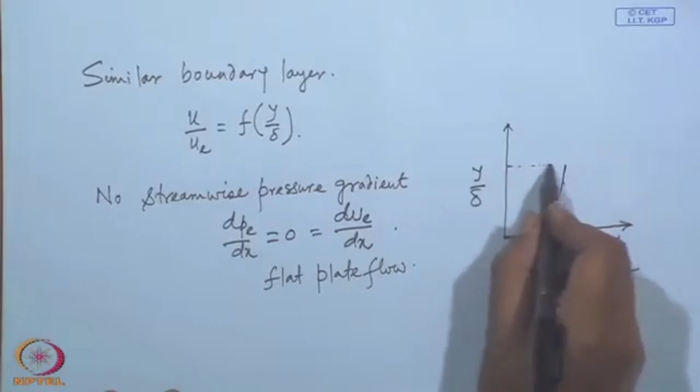Now, before we move forward, a few words about this boundary layer thickness delta. We have earlier also said that this boundary layer thickness delta is a little bit arbitrary. It is not a very suitable parameter to define thickness. There is ambiguity in how to define boundary layer thickness, because in reality there is no well-defined edge where the velocity fully becomes the inviscid flow. So for practical uses, sometimes we take it where the velocity reaches 99.5% of the inviscid flow, sometimes people take it as 99.75% of the inviscid flow, and so on. There is an ambiguity about it. However, it is always used as a parameter and always treated as an unknown. You need to find it.

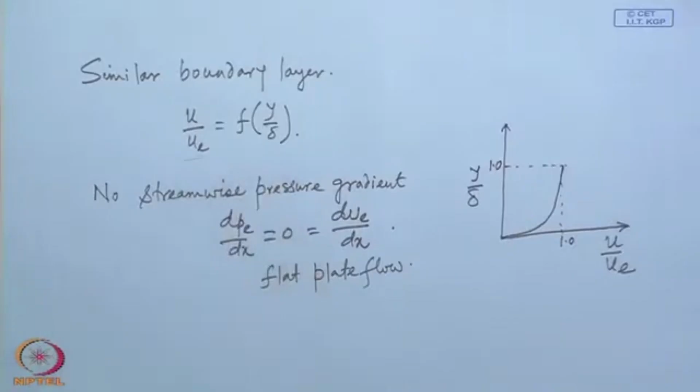A function of y by delta - so that is what we will take, a linear profile. Consider a linear velocity profile.

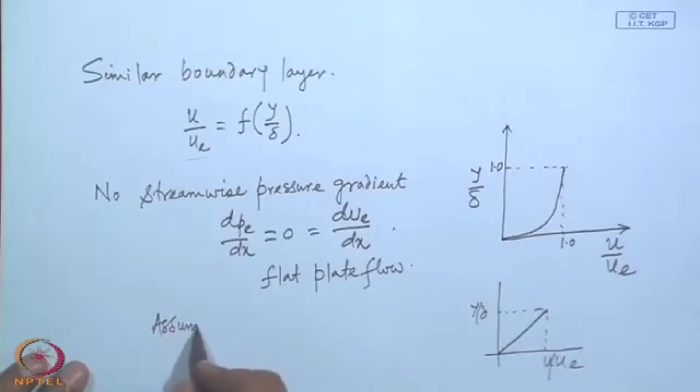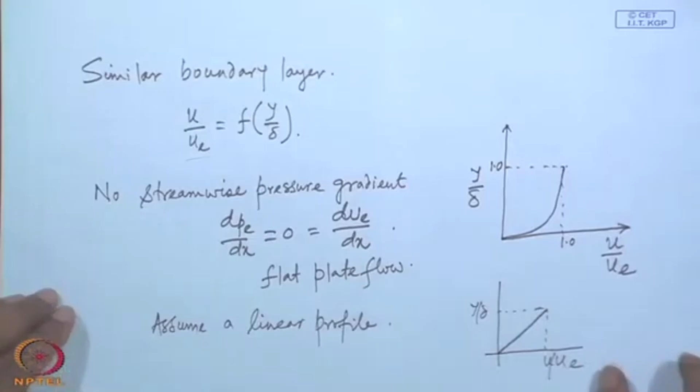The geometry is a flat plate. We would like to see that when the velocity profile is linear, what is the growth of the boundary layer, how the boundary layer grows, what is the skin friction and skin friction drag - that sort of things we would like to find.

Now, if u by u_e equals y by delta, remember delta is unknown, and of course it changes from point to point, that is delta is a function of x, not a constant, and usually delta increases as we move downstream - that is what is boundary layer growth.

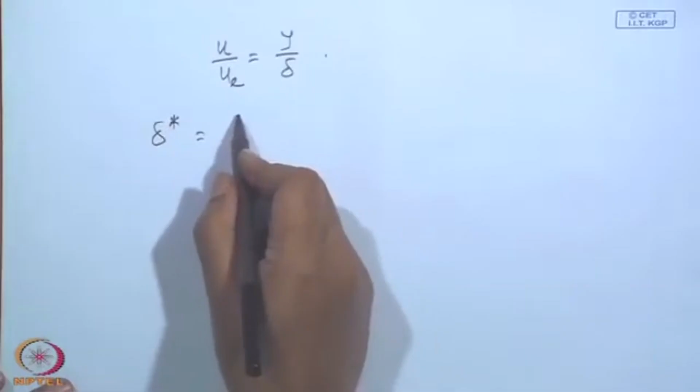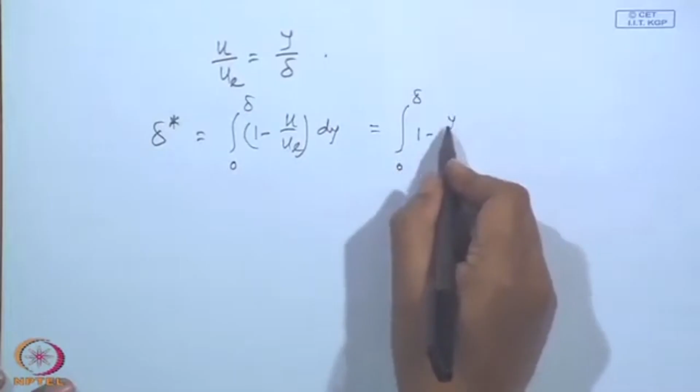So first find out what is delta star. What is delta star? How much is this? This is delta by 2. Okay, so the displacement thickness is delta by 2.

What is the momentum thickness? Theta. Delta by 6. Okay. So what we call the momentum shape parameter, the shape parameter - how much is it? Delta star by theta, that is 3.

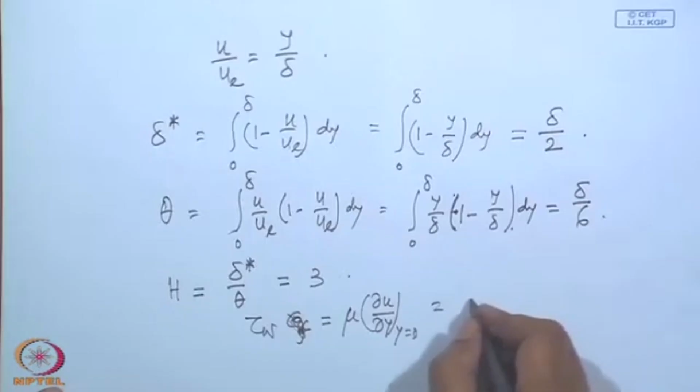And then CF becomes - the skin friction coefficient CF - okay, 2 nu by u square delta. Mu u_e upon delta, yes, that u_e I left, and here there will be no u square, it will simply be u_e. Okay, let us write it.

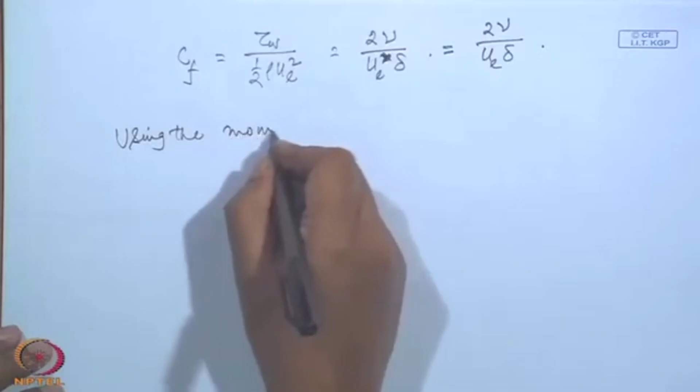So we can now use the momentum integral equation, and let us use the momentum integral equation for zero pressure gradient. The equation is then simply d theta dx equals half CF, that term H plus 2, into theta by u_e into d u_e dx - that is 0, because d u_e dx is 0.

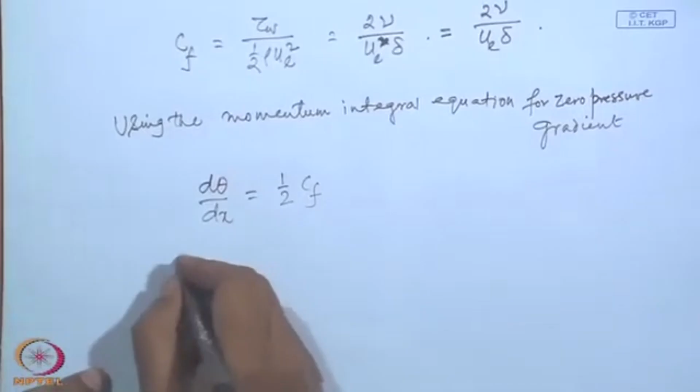So we now have d theta dx equal to - and if we substitute this value, what is d theta dx? One by 6 d delta dx. Half CF is nu by u delta. Okay.

So what is delta now? Under root 12 nu x by u. So, right, delta equals under root 12 - okay, we can write it as 2 root 3, under root nu x by u. The whole expression is under root 2 root 3 mu x, nu x, by u.

Can we express it in terms of local Reynolds number? Local Reynolds number is - Reynolds number, as you know, is u into a length by nu. If we use the local length as x, so u x by nu, that is what is Reynolds number, the local Reynolds number.

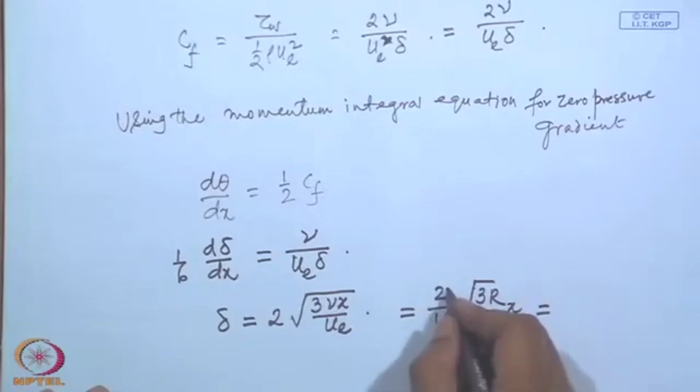Nu by u - that nu by u is still there. Two x into under root 3 by R_x. Otherwise, what it is - 2x, 3 by R_x, or 2 root 3 x - 2x is complete, then under root 3 by R_x. No, we will put it like this: 2 root 3 x, root R_x. R_x - this. Okay, let us see.

Take it for granted. Now, once we have found delta, we can find the other parameters - all of them. Once we have found delta, we can find now what is delta star, what is theta, and what is even CF.

Delta star you can write - delta star is delta by 2. So if we take - yours is correct - then this is... What is CF? What is CF?

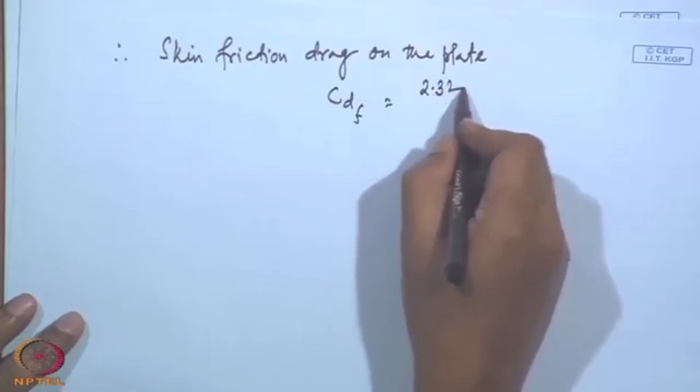So this is the total skin friction for one surface of the plate. So if the plate is immersed in a fluid, then the drag force skin friction drag on the plate is two into that quantity.

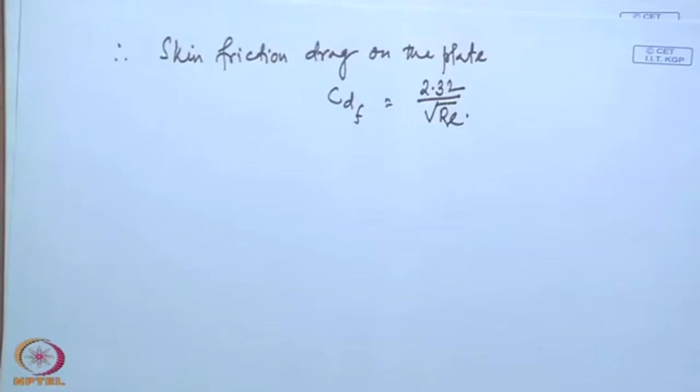So, in case we know the solution or how the velocity profile is, we can get the other answers, particularly the viscous skin friction drag. But as we mentioned earlier, viscous skin friction drag is not the only drag. There are other contributions to drag force also. One is that the boundary layer itself modifies the pressure distribution, and the inviscid pressure distribution does not give any drag force, but when you consider the boundary layer and the modified pressure distribution, that pressure distribution gives some drag force.

In addition, when you consider that the body is finite in the third direction, that finite geometry also produces another drag, known as induced drag. This will also be present, usually proportional to the square of the lift coefficient. And then there will be one more drag which appears only in supersonic flows. Other contributions will be discussed later, not now.

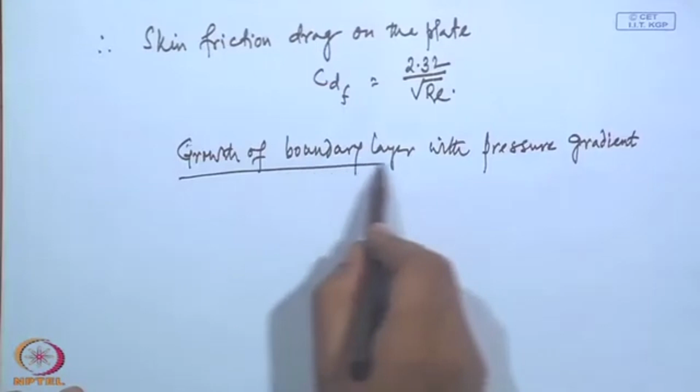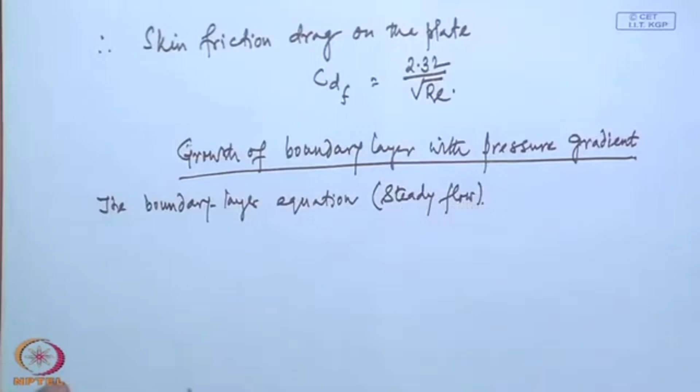To do that, let us once again consider the boundary layer equation. Only the momentum equation we would like to consider, and we will consider steady flow. Which, as you remember, is u du/dx plus v du/dy equal to minus 1 by rho dpe/dx plus nu.

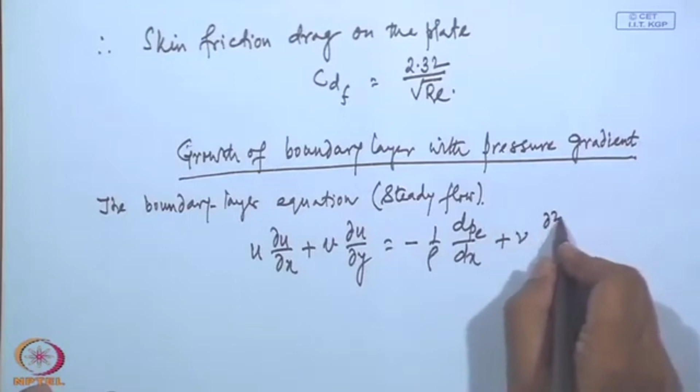This equation is satisfied within the boundary layer, so at y equal to 0 it will also satisfy. Now, satisfy it at y equal to 0. At y equal to 0, we know u is 0, v is 0. So the entire left hand side is 0. So what do we get?

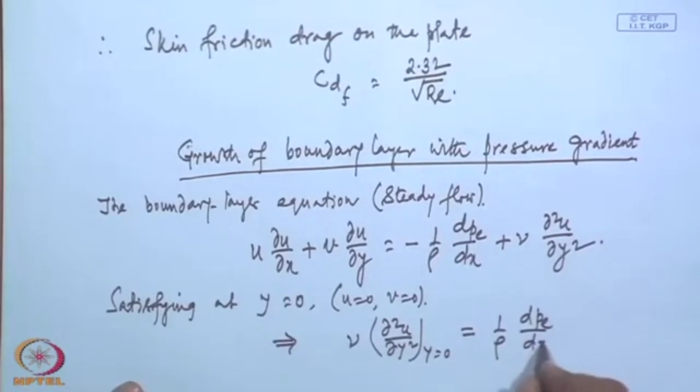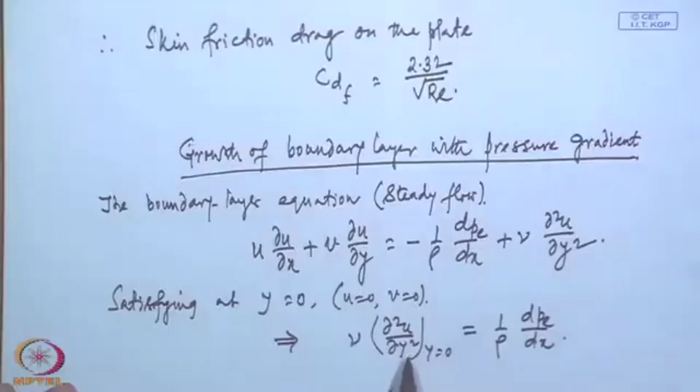Now, first consider the zero pressure gradient case. The zero pressure gradient says that d2u/dy square is 0, or the second derivative of velocity at y equal to 0 is 0. What can we say about the velocity profile then?

What we can say about the velocity gradient, du dy?

Velocity gradient is constant, du dy is constant? No, that is of course not. How much is the velocity gradient at, say, at the edge of the boundary layer? 0, that is known. The du dy at y equal to delta is 0.

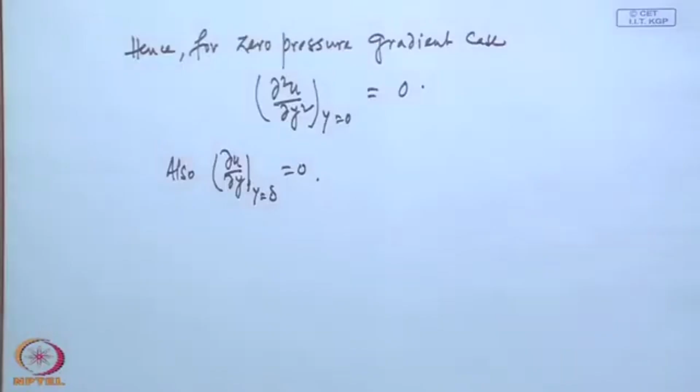At the edge of the boundary layer, the derivative du dy is 0. When does it occur? If the function is not a constant, du dy is not a constant, that we have seen. It might be a function of x. Or we are not considering any y-x variation here, we are just simply differentiating with respect to y.

At y equal to 0, will it be 0? You will say that du dy is 0 everywhere, or the velocity is constant in the boundary layer. That is of course against the concept of boundary layer.

It is not 0. It would have been a fantastic situation if du dy at y equal to 0 would have been 0, then there would have been no skin friction drag, and your aircraft could have flown without any fuel. So du dy on the wall is not 0.

When is the derivative of a function 0? If the function is not constant, is it maximum or minimum? So du dy will have the highest value at y equal to 0, the largest value, and definitely it is positive, because u is 0 on the wall and then it is increasing. So definitely du dy is positive at y equal to 0 in this case.

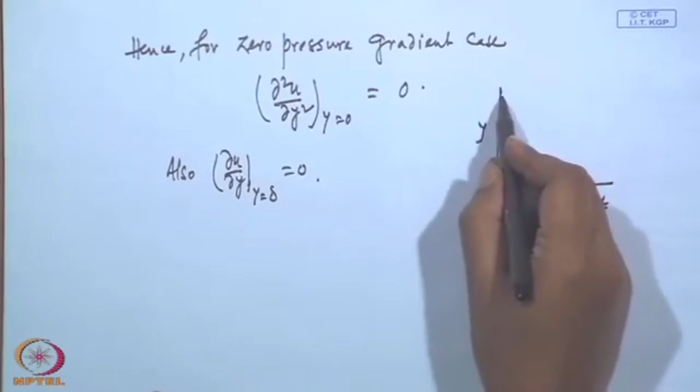And we can see that du dy starting from a positive value at y equal to 0, it decreases smoothly or continuously within the boundary layer. At the maximum, the double derivative is negative if it is a point of maximum. So it is not exactly the derivative because the function is not defined after that. For y negative, after that the function is not defined, so we can't do that. It is not maximum in that sense, but it will have the largest value there. So the variation of du dy will be something like this, smoothly decreasing as y increases.

Now consider a pressure variation where dp dx is not 0. Let us first consider dp dx is negative. When dp dx is negative, what will we call the flow, accelerating or decelerating? If dp dx is negative, it is accelerating, because we have already seen dp dx equals minus rho u du dx.

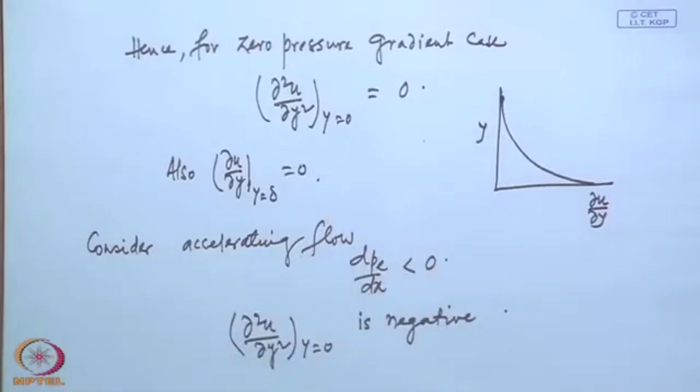Then what about d2u dy2? What happens in this case? Will there be any variation from the earlier case?

Remember simultaneously that u is also increasing from 0 to u at the edge. That part also you must remember while thinking about the gradient, that u will increase from 0 at the wall to u at delta.

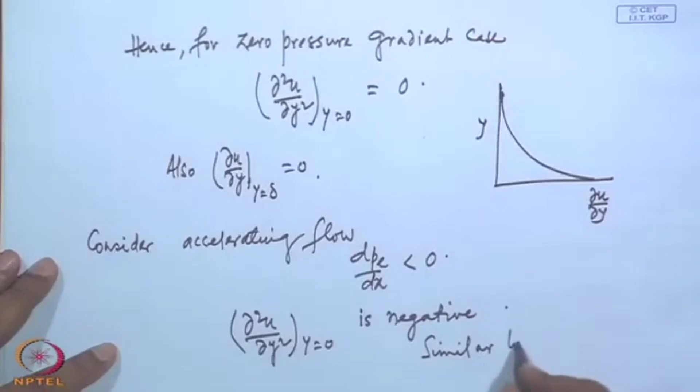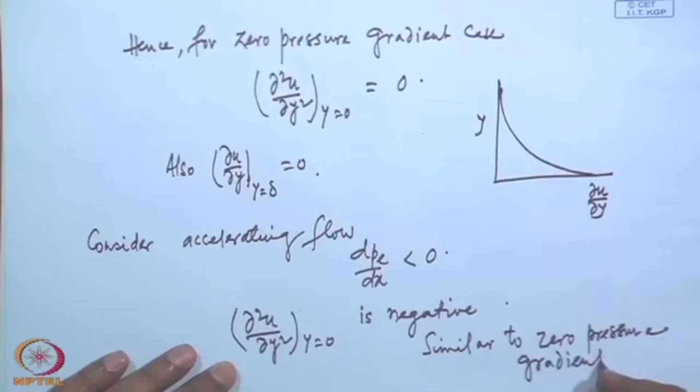Since u is increasing from 0 to something at the wall, du dy there is positive. Du dy on the wall is always positive, not always, say it is positive when u is increasing. But then d2u dy2 is negative. It will also be similar to the earlier one, similar to the zero pressure gradient case as far as this trend is concerned, and in either case there will be no inflection point in the velocity profile - a decreasing function in both cases, with no inflection point.

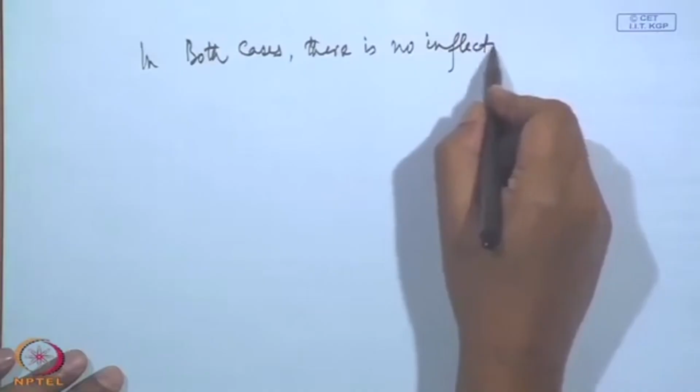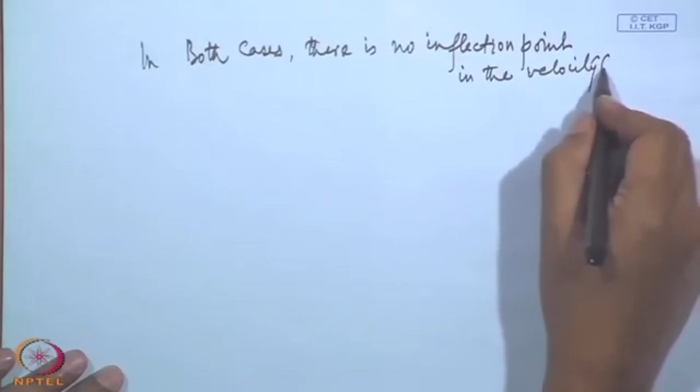Consider now the other case, the decelerating flow.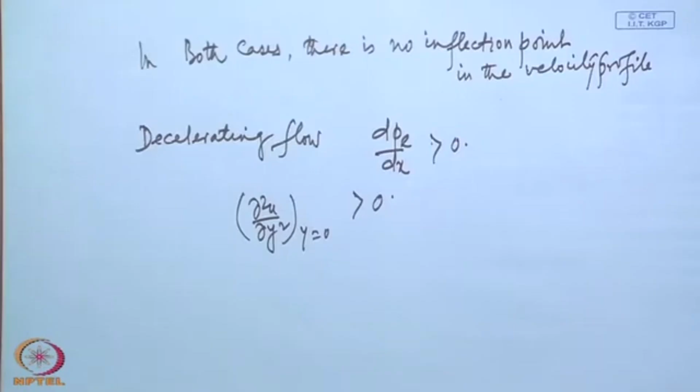This time there will be an increasing, but then it has to decrease again. So then what else? du/dy will change sign.

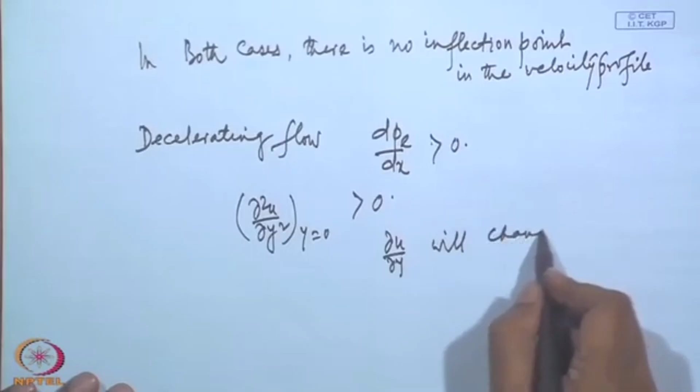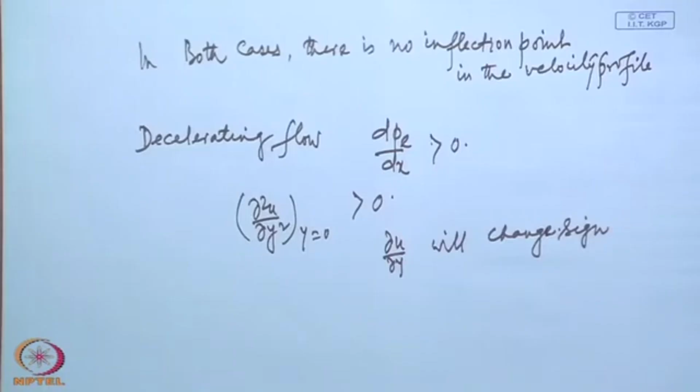Or what does it mean? The velocity profile will have an inflection point.

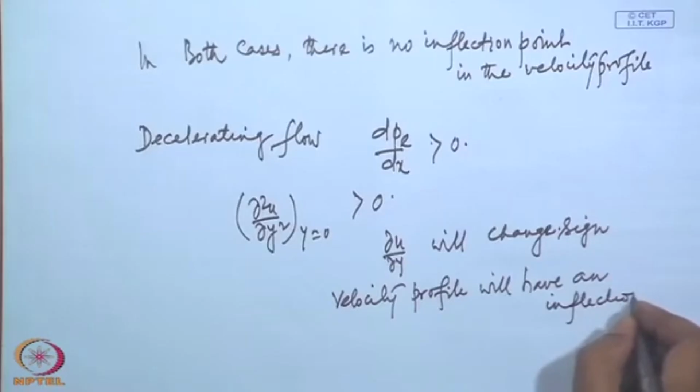Now what really happens in cases is that a situation comes where du/dy on the wall in this case will be much smaller compared to the other cases. Not only that, as we move downstream, a situation will come where du/dy on the wall will become 0, and subsequently du/dy near the wall will become negative.

And what does it mean? That actually in that part the flow is not from the direction that we considered earlier, rather it is from the other direction, that there is some back flow, or the original main flow has separated from the body. Let us say the flow is coming like this, and after this, instead of going like this, it has separated, and flow from this side has come like this.

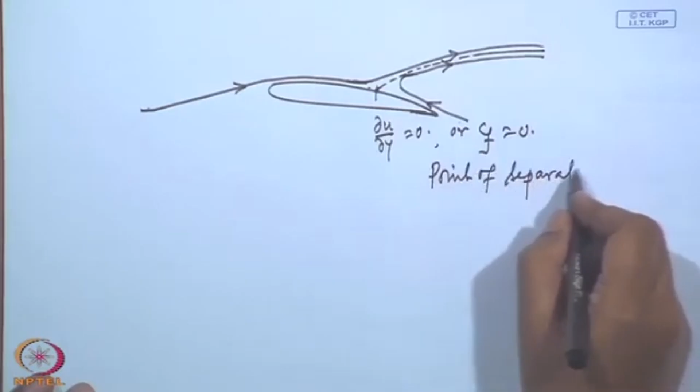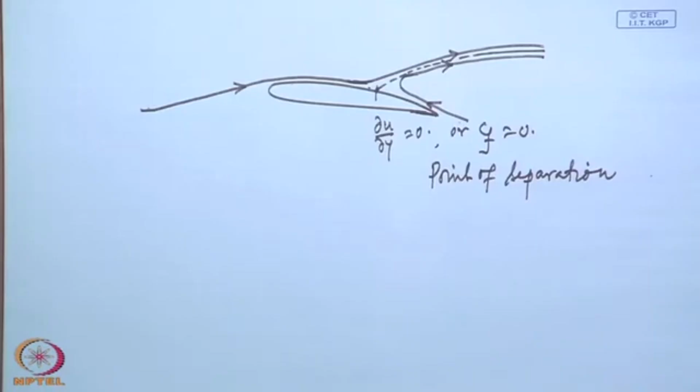Now, in an airfoil type of geometry or a streamlined geometry, this separation occurs at certain angle of attack, not at 0 degree or 1 degree, but rather of the order of 15 degree angle of attack. When this separation occurs, the airfoil experiences a loss of lift, the lift coefficient started decreasing, and if the separation is further ahead, then the lift will become so small that the aircraft may not be able to fly, rather fall down like a stone, known as stall, which is because of this boundary layer separation.

However, as you will be knowing, whenever there is a positive pressure gradient, it does not mean that the flow has to separate. A positive pressure gradient, known as adverse pressure gradient, means the pressure is increasing downstream. That point of inflection is obvious, it will be there, but later on you will learn that if the velocity profile has a point of inflection, then the flow is highly unstable.

You might have heard of something called stability, instability. The mathematical equations which represent some physical system, they become unstable. We will not discuss that, but if there is a point of inflection in the velocity profile, then that flow is likely to be unstable.